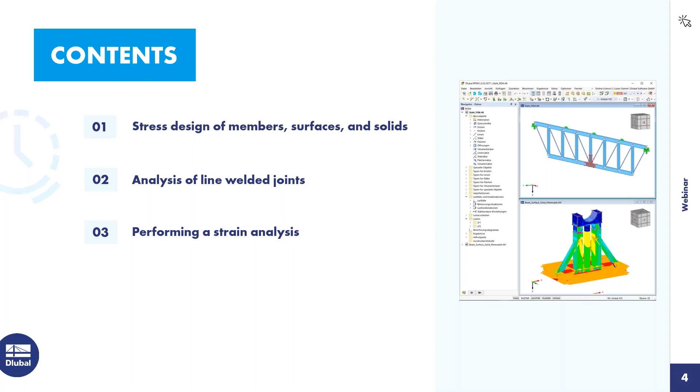Before we go into the live demonstration, I would like to quickly mention the contents of today's webinar. In general, I want to give you an overview of the stress-strain analysis add-on. I will start with the probably most used functionality, the calculation of stresses of members, surfaces, and solids. In the next chapter, I continue with the stress analysis, but for our newly implemented line welded joints. Newly implemented means we have them since RFEM 6. In the last chapter, I intend to show the strain calculation, of course in combination with the plastic material behavior. I will do it as a live demonstration, so I will jump directly into the program, and today I would like to work with predefined files in order to keep the focus on the essential topics.

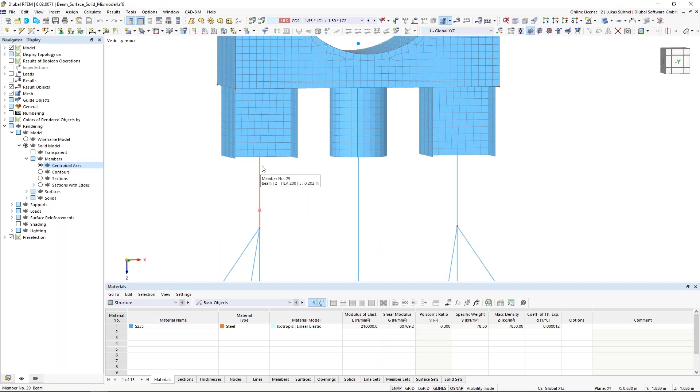What do I have here? I have a mixed structure, mixed in the meaning that I have a member structure, surface elements, and also solids. Let me quickly change the rendering so you can easily see the differences. On the bottom we have this member structure. Then I converted a certain part of my members into a surface structure, as you can see here. It's just the continuation of my members if I display them again. And on top of that, I have my solid model on which I will place some loads.

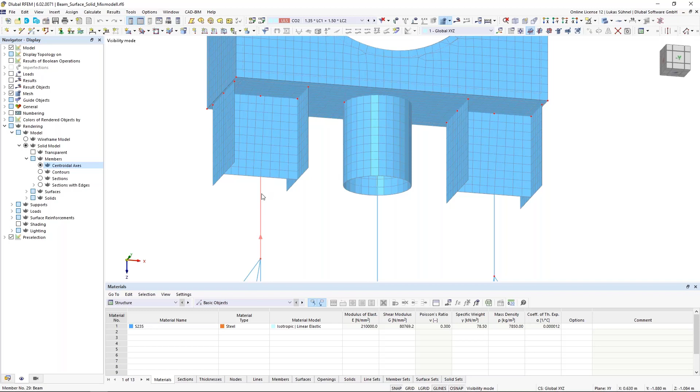Regarding the modeling, which is maybe also interesting to know, we can model members, surfaces, and solids in one structure, which is already quite nice. And if you think about the load transfer and the correct transfer of the stiffness, you have to take care of some things when you have a 1D element and 2D elements.

By simply converting these members into surfaces, as I did it here, often you don't have a properly or correctly defined connection. You can see it on the left. The surfaces in that area are now basically supported on only one FE node - the FE node where this member connects to the web of this beam. That is of course not correct. You would definitely get singularities in that area, and the stiffness transfer is also not correct.

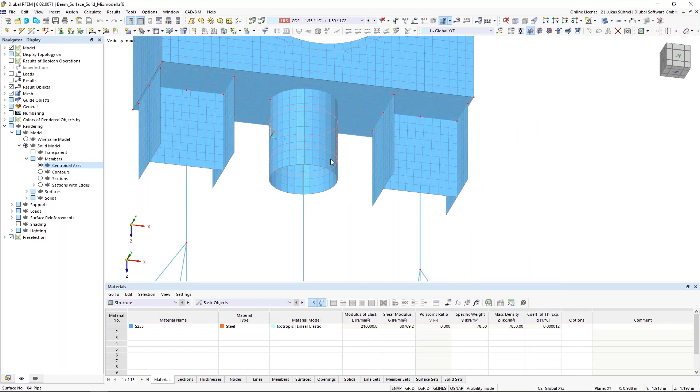Another example can be found in the center. We have here a pipe section, and when you convert a pipe section into a surface, you get of course the pipe surface. In such a case, you have no connection at all. You can imagine the member is in the center of that circle, and the surface is of course not connected to that member at all. So here we also have to do some modifications in the modeling to have it properly connected.

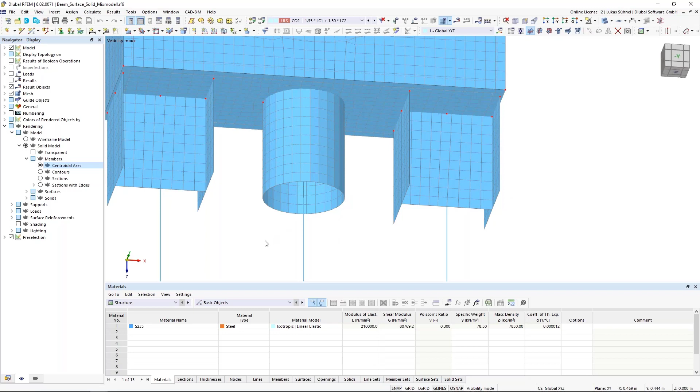And I have it here, I just didn't show it so far. So I will cancel my visibility mode. The connection can be done in two ways. I can use so-called rigid surfaces, and this simply will transfer all my forces and my deformations that I have in this beam, or also vice versa in that surfaces, via a stiff surface onto the other side.

In the center, it's even more crucial, because with this stiff surface or rigid surface, I'm connecting my member with my surface. Before I had no connection at all. And again, all deformations and internal forces will be transferred from the beam to the surfaces equally. An alternative modeling is visible here on the right-hand side.

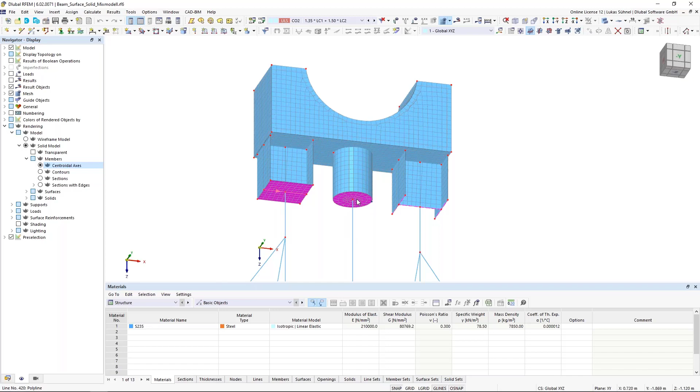Instead of using a rigid surface, I simply assigned rigid members onto the boundary lines of my surface model. A member with a member type rigid works similar to my rigid surface. So this is how you can connect a 1D element with a 2D element. The rigid surface or rigid member may help you here.

Regarding the connection of a surface model with a solid, this is quite easy. The surfaces are defined by the boundary lines. These are those lines here, which you can see. And these lines are placed inside the boundary surface of that solid.

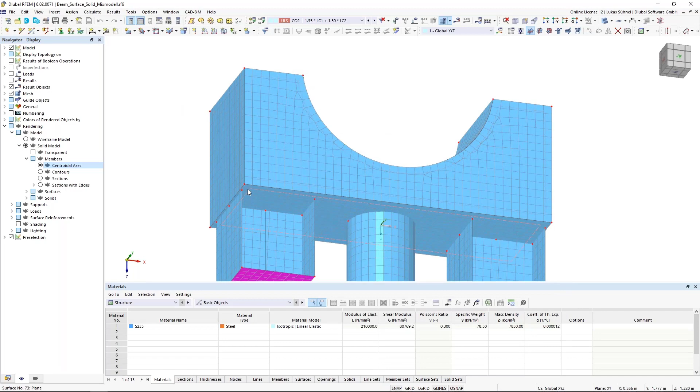And we have a so-called automatic object detection in those surfaces. So the surface detects that there are lines placed inside the surface. And if that's the case, then the FE mesh generator will automatically consider those lines when the mesh is generated. So we have a fixed connection between those lines or surfaces and the solid.

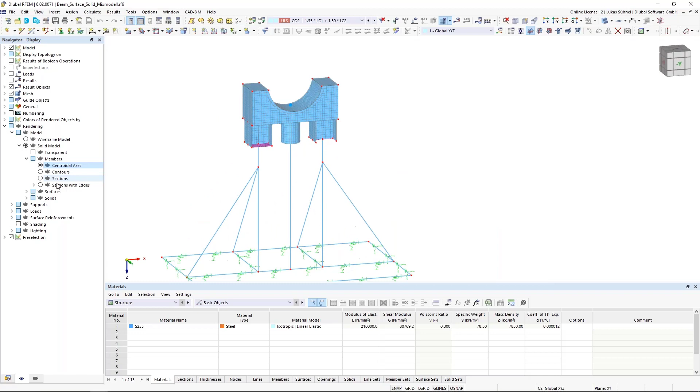So far regarding the modeling. Regarding the loading, this is German names, never mind. I have two load cases. I have my dead load case here, and then some load in my live load case. That's all I want here in that example.

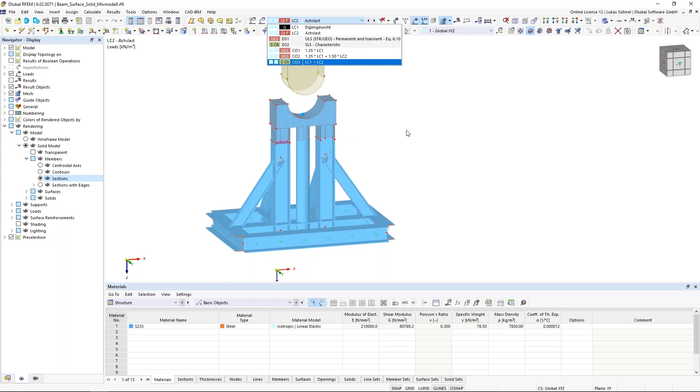And of course, we have the combination of those load cases using an ultimate limit state design situation and a serviceability limit state design situation. Now, if we want to design such a structure, we have two main designs that we have to run. We have to run a stress analysis or a cross-section check for our objects, and we have to run a stability design.

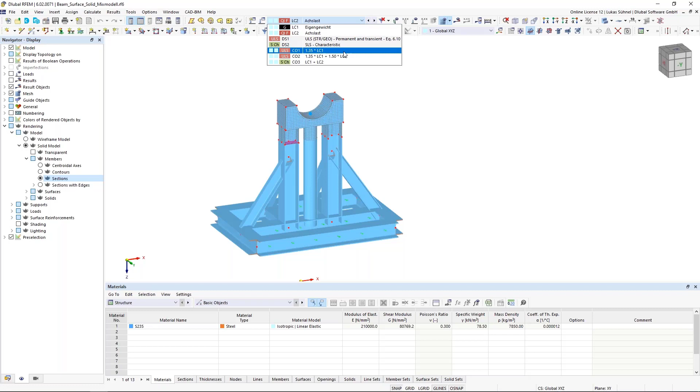Regarding the stability design, I would like to take a look at the results first. So that's what I will do now. I will calculate the important load combination. I have just one here that actually matters, the combination of the dead load and the live load. And let's have a look at the results.

Maybe just on the members for now. I can display the axial forces in here, maybe in a different view like that. And what I can see here is I have, of course, compression in my columns or in my members. So compression is, of course, a sign for buckling.

So if I have compression in members, I have to check buckling. And what else do I have? I have some shear forces inside, but they are really small, so shear buckling is most likely not an issue. I have really small torsional moments, I can neglect them. And my bending moments, MY and MZ, are also quite small compared to my cross section or to the dimensions of these beams.

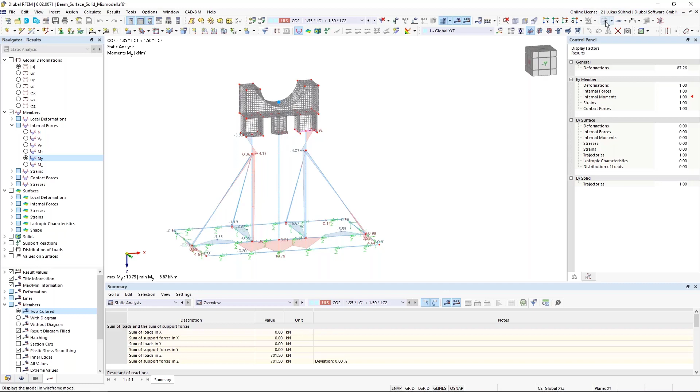So I would say also the bending moments can be neglected. What does it mean? If I neglect the bending moments, then lateral torsional buckling is most likely not an issue. And if I check again my structure, I have all these diagonals here that are connecting to my columns, a pipe section, where lateral torsional buckling is not important at all. So I think it's fair to say lateral torsional buckling is not an issue here.

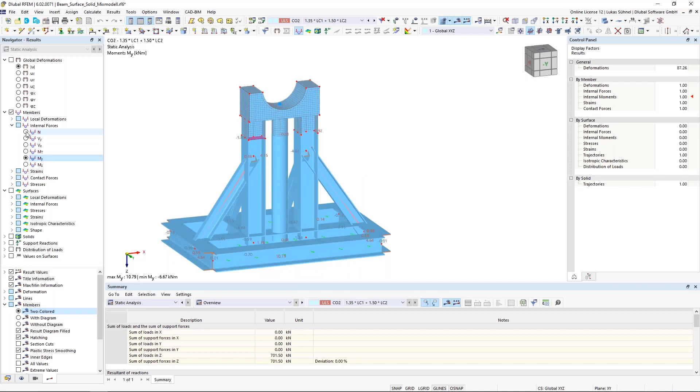What could be an issue is, of course, buckling. But for buckling, I can use some limit checks or some specific checks to judge if buckling is actually an issue. And such a check can be found inside the Eurocode 3 in chapter 6.3.1.2, in brackets, 4.

The formula basically is you take the axial force in a member and divide it by the critical force of a member. If that ratio is smaller than 0.04, you don't have to run a buckling check for the member. If we switch it around, the critical force divided by the existing force, if that is bigger than 25, then buckling is not an issue. This is a value we can check via a specific add-on.

I want to do this quickly before I start the stress strain analysis. So if I go into my add-ons, I can activate the structure stability add-on.

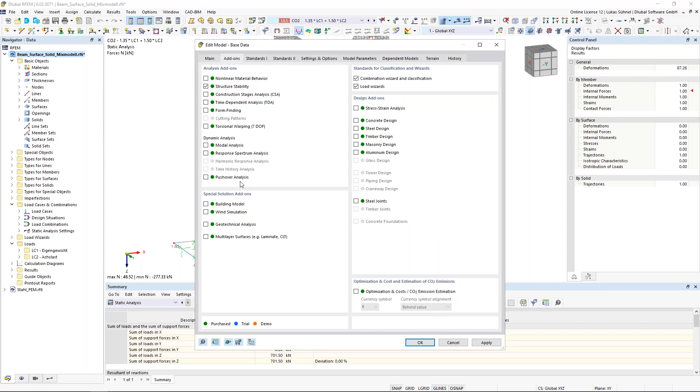Now this will calculate the critical load factor, which is the same as I just said, the NCR, the critical force divided by the actual force. I will calculate it for this specific load combination. I can activate the calculation of the critical load, and I will start the calculation.

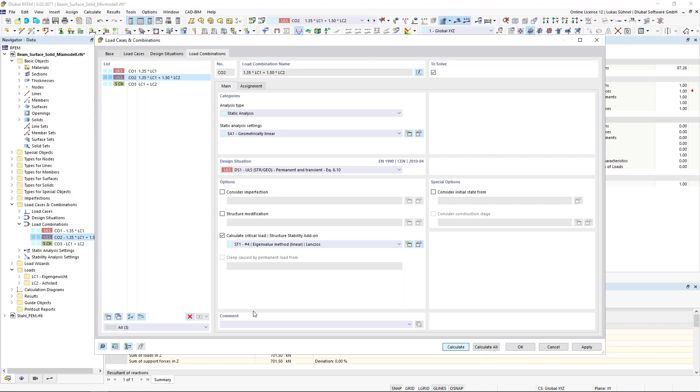So this add-on will calculate this critical load factor. It will also calculate buckling lengths and buckling length factors. For me, what's important now is only the critical load factor. Again, if that is bigger than 25, then buckling is not an issue.

Just a few seconds more. All right, there we are.

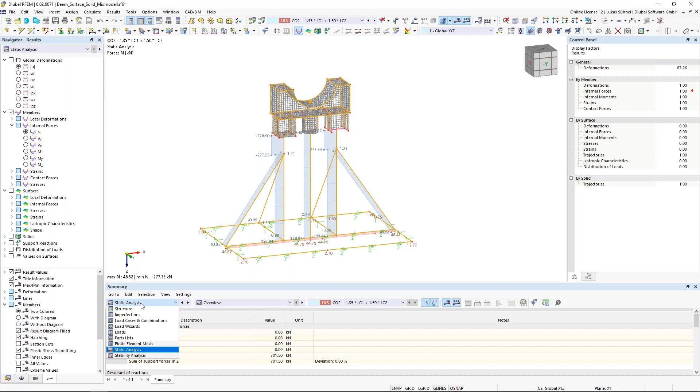So how can I display these results? I can switch in my tables to this stability analysis add-on. The first value shown here is already the one I'm interested in. The critical load factor is 29, which is bigger than 25, so I'm good.

If I want to analyze it further, I would have to look for an eigenmode that actually deals with the buckling. This could be, for example, the fourth eigenvalue eigenmode. Here we see this would be some kind of buckling for my columns.

I have here the factor 34.5, so much bigger than 25. So I can easily say buckling is not an issue. Now I've excluded buckling and lateral torsional buckling. That means it is enough to simply run a stress analysis for the structure.

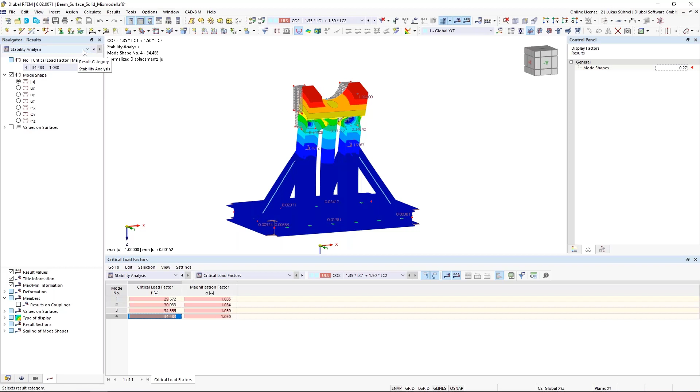I can do it in two ways. First of all, I would like to check what result RFEM, the basic RFEM, gives me. So I go back into my static analysis results without using any add-on, and I can see that RFEM calculates the deformations, of course.

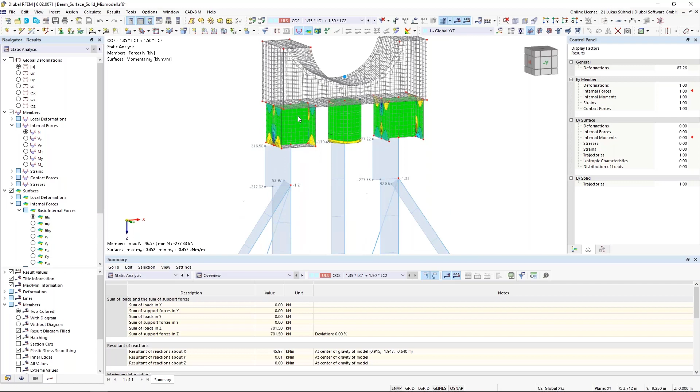It calculates the internal forces in members. It calculates the internal forces in surfaces and so on. But it also gives me the stresses in members, for example the equivalent stress according to Mises. It also gives me the stress inside surfaces, and of course also in my solids.

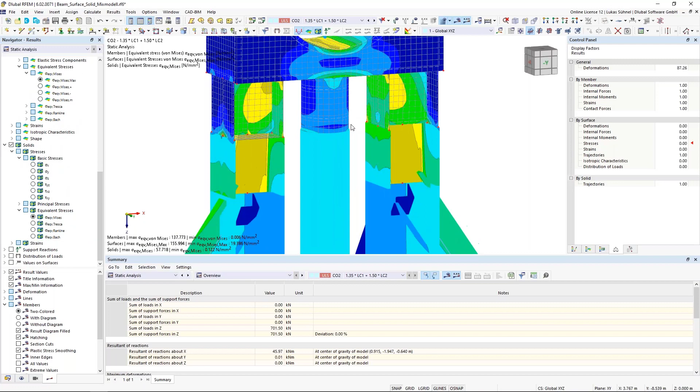So now I'm displaying the stress on all elements. You could use the information in this panel on the right-hand side, or the max-min information on the bottom left of this graphic window, to see that the maximum stress for members, surfaces, and solids is below the yield stress from my steel S235, 235 Newton per square millimeter. We are actually below the limit, so the stress check is fine.

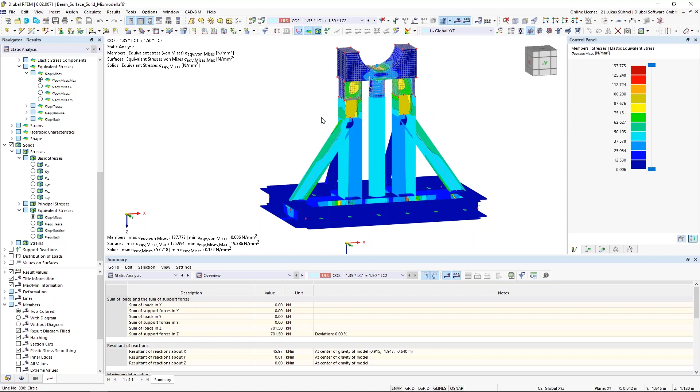Now, if you prefer a design ratio, not just a graphic which shows that stresses are smaller than 235, then you could use the stress strain analysis add-on for that. Let's check this out as well.

I will activate the add-on in my add-ons tab, as I did before with the structure stability. The stress strain analysis add-on can be found on the right-hand side under the design add-ons. Usually we have to deal with standards—if we run a steel design or a concrete design, the standard is important. The stress strain analysis add-on is standard independent, so we don't care in that case.

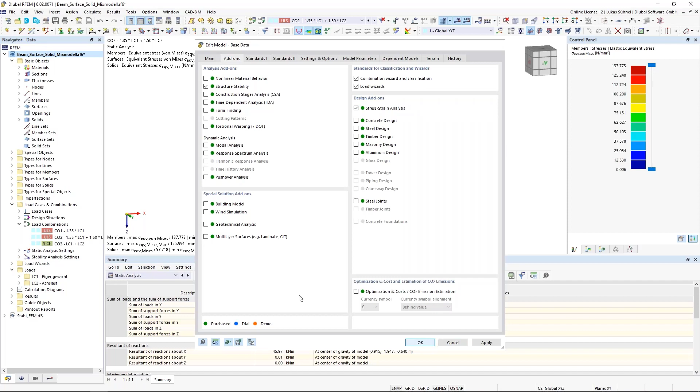Now, when you activate an add-on, you get a new entry in the tables, and this is how I personally usually deal with add-ons. I go into my table on the bottom and click through these subtables. Let's do it for this example.

Just use a different display. I'm here in the input data, in the first subtable design situations, and here I can decide which design situation should be analyzed. Of course, it only makes sense to analyze the ultimate limit state and not the serviceability limit state design situation, so I deactivate the second one.

In the next table, you can select which objects you want to analyze. Here, all objects are selected. You could select the surfaces or the members that you want to analyze if it's not all of them. In my case, I will simply analyze all.

There's another table which looks similar, but this is called objects to analyze stress ranges. If you want to run a fatigue design afterwards, you need the stress range, the difference between the maximum and the minimum stress at a certain location. You can select those objects where you need the stress range. In my case, let's say I need the stress range in my solids, so I'm selecting the solids.

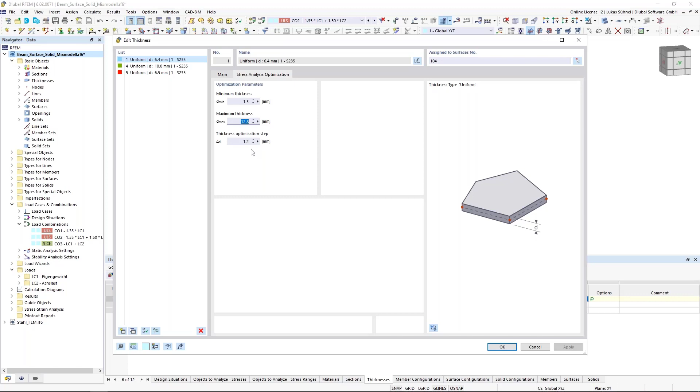So let's say you have a specific surface and you're not sure which thickness is appropriate. You can right-click and activate the optimize functionality here as well. Then you get an additional window where you can define the minimum thickness, maximum thickness, and the step, and it will look for the best thickness. I will not use this now, just as information.

Now we have 3 additional subtables here: configurations. In those configurations, you can define which stress you want to analyze. You could select all of them, but usually that's not what you care about. Usually you only care about, say, the equivalent stress according to Mises, the total shear stress, or the total normal stress - this is maybe what you're interested in.

With a click in this table, you select which stresses you want to calculate, and with the center column, you can also define the limit stress. You can see here the limit normal stress, limit shear stress, and limit equivalent stress are selected.

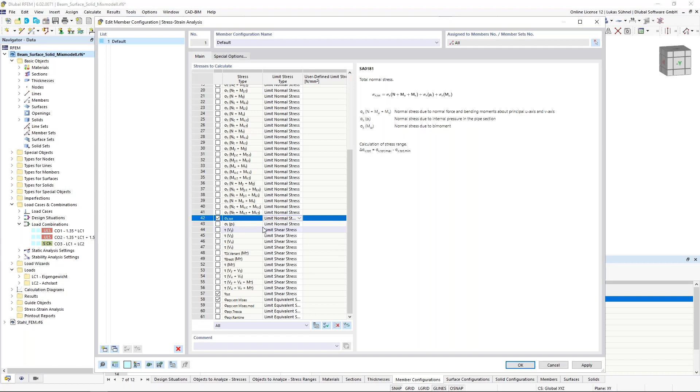We try to do it automatically for certain materials, but for some materials we can't. In that case, you can select 'user defined' here, and then enter a value in the last column. In my case, I'm using the limit normal stress.

For the surfaces, basically the same configuration - let's select only those two. And also for the solids we have a configuration. Again, I'm only interested here in the equivalent stress according to Mises.

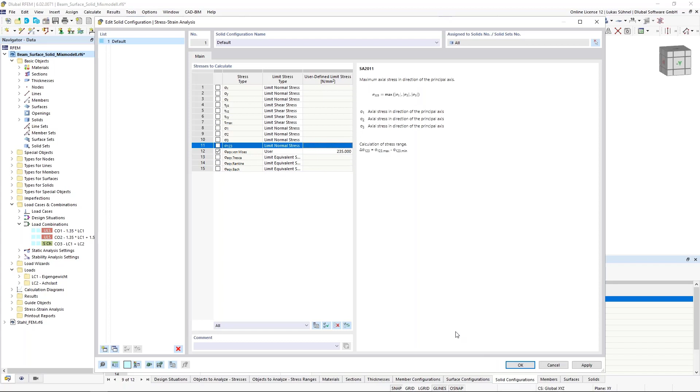And just to show it, we can enter here a manual value, maybe 235 Newton per square millimeter for my material, which is an S235. So that makes sense.

In the last tables, you can assign the different configurations that you may have to your members, but you can also do it graphically. So let's say you have multiple configurations for your members - you can edit the members and simply assign the configuration in that window to them. The handling, I'd say, is quite easy.

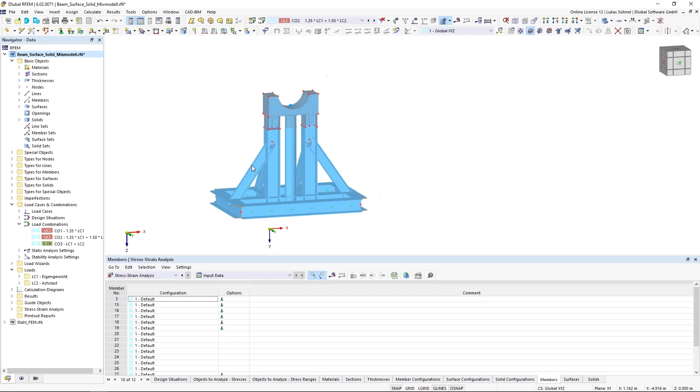We already finished with the input, so we can run the analysis.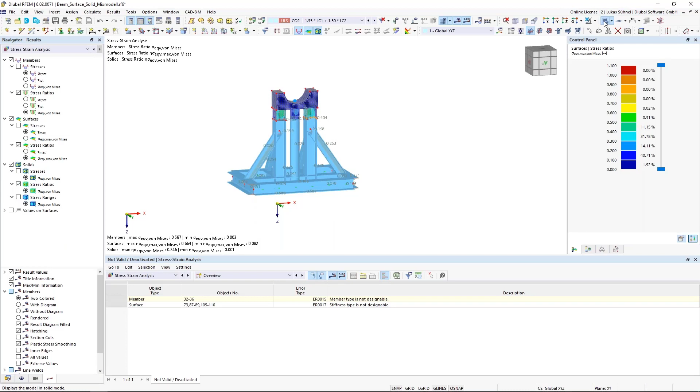All right. So after the analysis, we get results graphically and also in the tables. Let's start with the tables first.

If there are design checks which are not fulfilled, or you have selected objects that can't be designed, you get an overview table. If everything is okay, you won't see this overview table. Just in case something is not correct or you get a warning, it will show up as shown here. We can see here for some members and some stiffnesses or surfaces, basically, the design is not possible. That's nothing which should bother us.

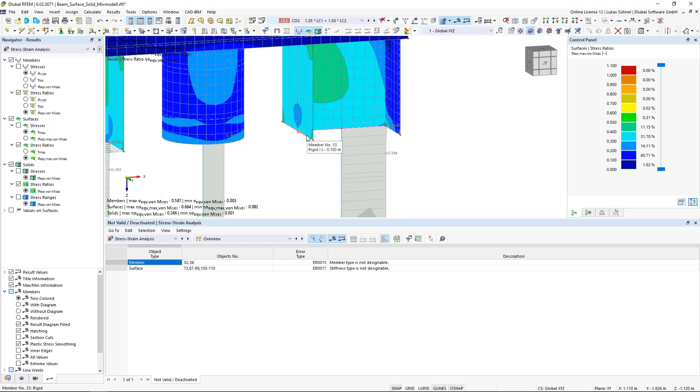At the beginning, we said please design or analyze all members. All members also included the rigid members. That makes no sense, basically. We have no section for them. We have no material assigned to them. We can't analyze them in this add-on. That's what this add-on just tells us here. They are not designable. And the same, of course, for the rigid surfaces. So nothing we have to worry about in that case.

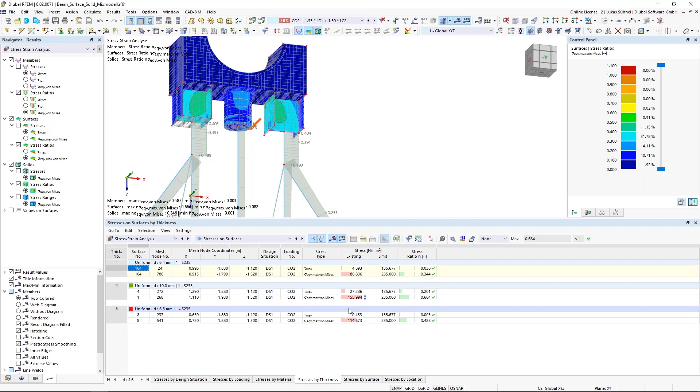If you want to see the details of the results, then you can go into the stresses on members tables, or stresses on surfaces and stresses on solids, of course. So this is the stress or table output with different filters by design situation, or for each surface, the maximum stress, or for the various thicknesses that we have assigned here. So these are the filters basically for the results.

We can also display these results graphically. On the left, you can see we have here an updated result navigator now for the stress strain analysis results. And here we can select the stresses in our members, on the surfaces and so on. I think this is quite clear how to handle that.

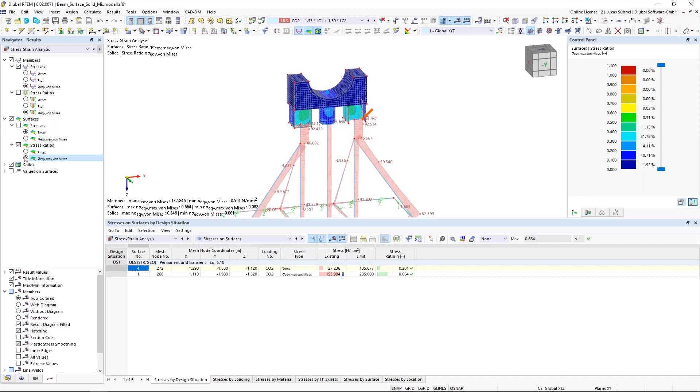And the last information here, we also selected the solids for a stress range analysis. Again, those results can be found in the tables. This table looks a bit different, as you can see. You can see the minimum stress, the maximum stress, the range, the difference basically. And you can also see which combination or combinations are linked to this stress range.

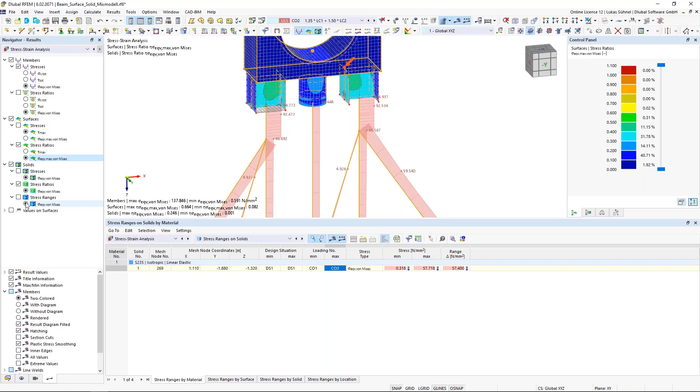All right, again, we could display this graphically. So far regarding this basic functionality, the stress analysis on members, surfaces, and solids.

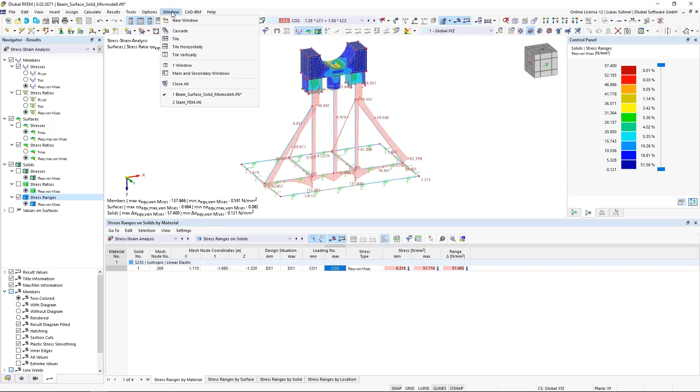And now I would like to switch to my second chapter, where I would like to show you the stress analysis of a line welded joint. For that, I have a different structure. And let me quickly explain it.

It's a 2D truss member. Basically, the tension forces will be taken over by these round bars, the compression by these HEA sections. And one particular detail joint I wanted to analyze with surfaces, basically. You can see the rest of the structure is again a beam structure, a 1D element structure, and this specific detail I want to analyze in detail using surfaces.

I modeled the connection plates here, these tension members are connected to this bolt, and this bolt transfers then the forces onto my connection plate.

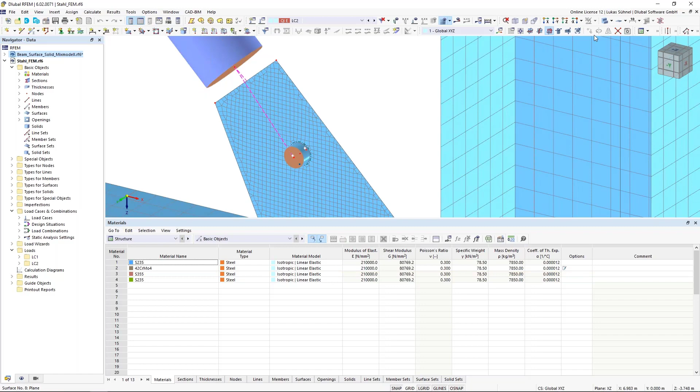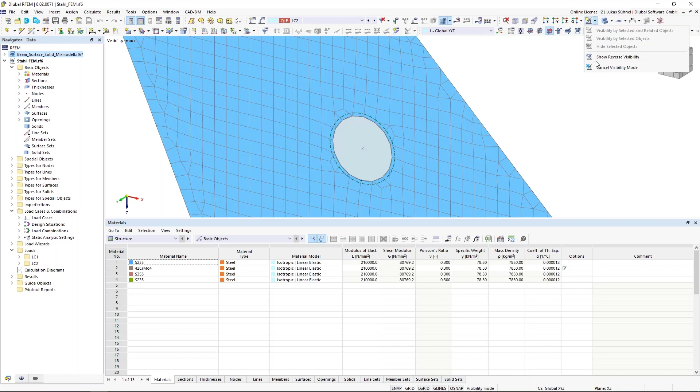The force transfer, for those who haven't seen that before, can be done like this. Usually you create an opening inside that surface where the bolt goes through. But if you have a bolt in the center as a member element, it's not connected to the surface. So somehow you have to establish this connection between, let's say, this node and this connection plate.

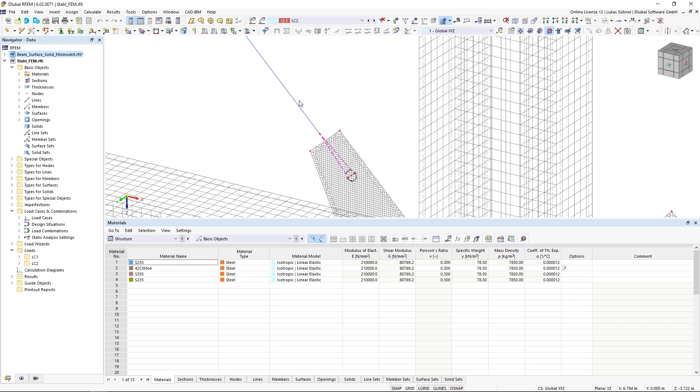And this can be done using a specific surface. So I filled that hole again with a surface, and that surface has a stiffness type without membrane tension. This specific type simply acts only under compression. So you can imagine if we have tension forces in that tension member, then the bolt will be moving to the top left, upwards, and we will get compression in that area. We will get tension on the back side of this plate, but since this surface will fail under tension, we have only forces on the left-hand side. And this is, let's say, a good feature to consider this connection between the bolt and the hole.

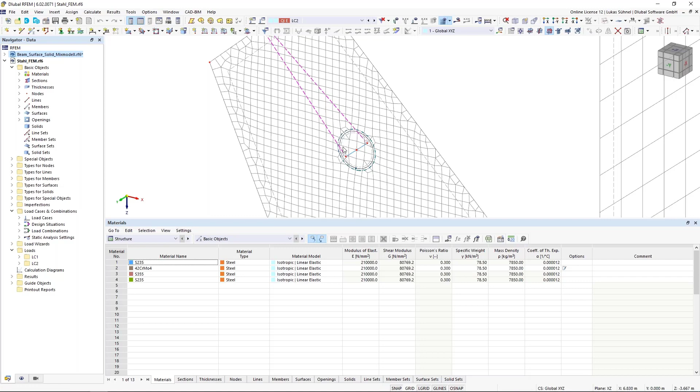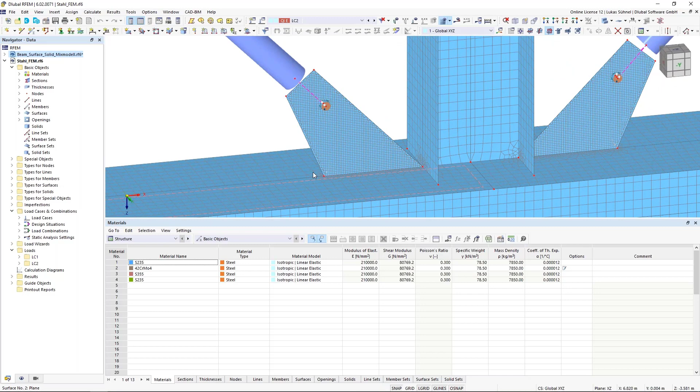All right, so far regarding the modeling. I have, of course, my steel connection plate here, and the steel connection plate should be welded to my top flange of this I-section. Now, if I want to design such a weld, I can use this new object which we have in RFEM 6. It's called line welded joints. You can find it under types for lines.

And you can define a new type in here. Let's say this weld that I want to design is a T-joint, a single fillet weld, continuous arrangement, and the weld size is 4 millimeters.

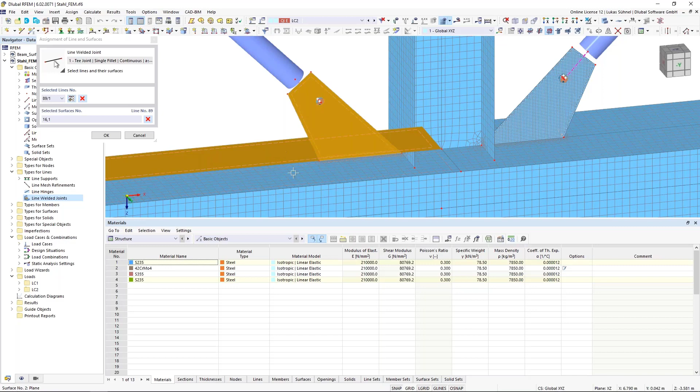So far, so good. Now I can assign this type to my lines, and the weld should be placed here. It's not enough to just connect the line, we also have to select the surfaces that are participating, basically the steel connection plate and the upper flange of my beam. That's how we can define such a line welded joint. We will show it as a dotted line on each of the participating surfaces.

And if you want to design such a weld, you need the stress strain analysis add-on. Basic RFEM 6 won't give you any results for that line welded joint, so it's required to have the stress strain analysis add-on, and that's why I'm activating it again.

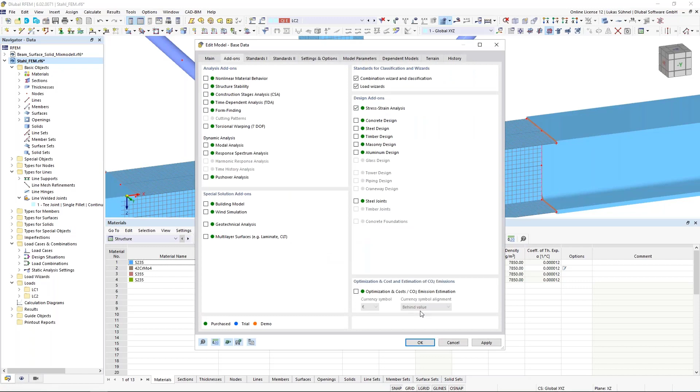Now let's go quickly through the input of this add-in. I'm starting again with the design situations, I think that is clear. Objects to analyze: in that case, I don't care about the stresses in my members.

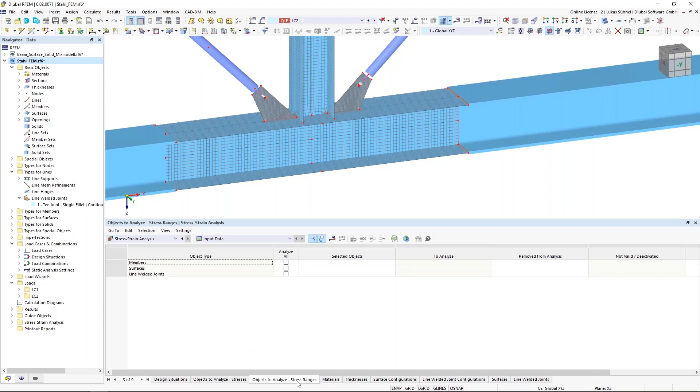I want to select just some of the surfaces that I want to analyze, not all of them, and of course I want to analyze my line welded joint. Stress ranges, I don't care about in that case here.

And I will continue with the surface configuration. Again, I will select just some of the stresses, I'm not interested in all of them. Maximum shear stress, maximum stress according to Mises is quite interesting for me.

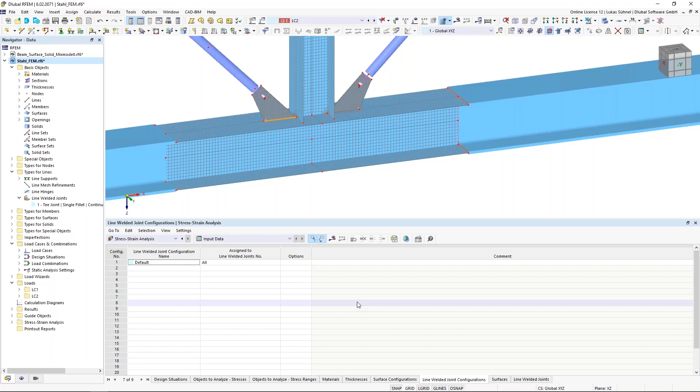And now we have also a new configuration for my line welded joint. Each specific object has its own configuration: surfaces, members, solids, line welded joints. And in here, it looks basically the same - I can select which stresses I want to calculate.

Even though you select maybe all of them, not all of them will be shown. It depends. For my fillet weld, I have two different methods, the simplified method and the directional method. Let's say we are using the simplified method - for that method I only need the following stresses, those four, and the resulting weld stress. If I select the others as well, they won't show up in my result table since they are not part of this simplified design method. So that's why I select just those four, those five.

And same logic as before: when we select the stress, it means we tell, or we say to the add-on, please calculate the stress for this specific stress type.

By default, we do not get the limit stresses for the welds. You can see it here, it's selected none. Why is that the case? Well, we are standard independent in that add-on. That means the limit stress for welds is, however, standard dependent usually.

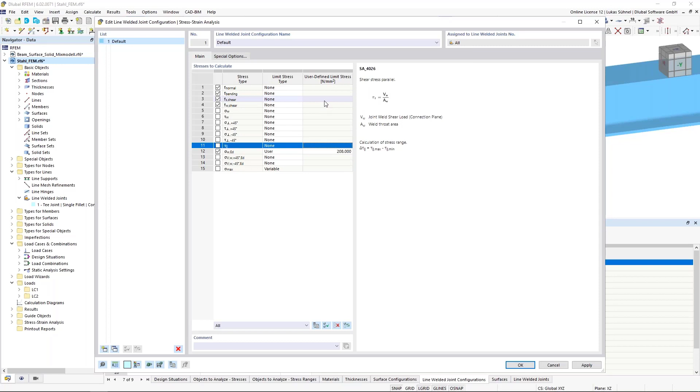Let's say we assume here a Eurocode design, then the limit stress for this simplified method would be for an S235: FU divided by square root 3, divided by beta W, divided by gamma M2, which is 208 Newton per square millimeter. I could also enter this limit stress for the other types, but it doesn't matter - I only need it for the resulting stress.

All right, so far so good. I defined all necessary inputs, and now I can run my stress strain analysis again.

Okay, I get the overview table. It shows me some exceeding stress for my surfaces. I will take care of that later on.

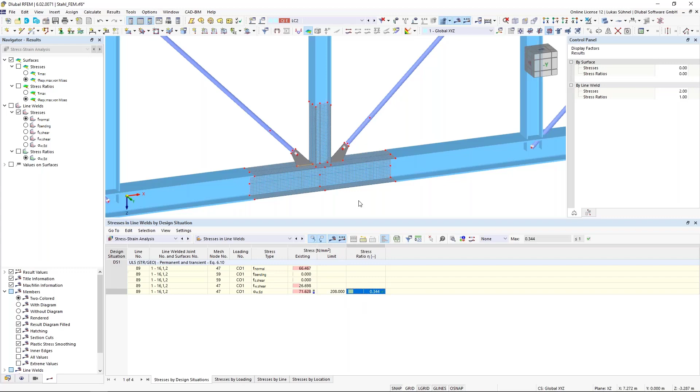Now I'm interested in the line welded stresses, and we can see here we have an existing stress of 71 Newton per square millimeter, which is smaller than the limit. So we get the design ratio, and the weld has been checked.

We can also display the results graphically as usually. Just let me show it quickly. We get the diagrams also shown here. Maybe it's better to select a specific visibility for them: the different stresses, normal stress, shear stress, resulting stress, and of course also a stress ratio, and that's it.

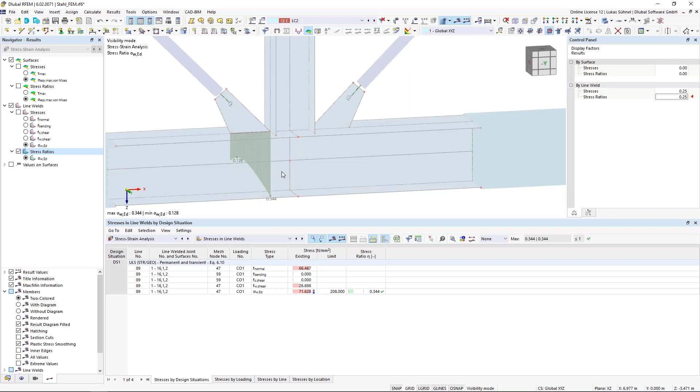You can of course print these graphics into your protocol as you are used to in Dlubal. The tables will end up in the protocol, so I think the handling, the post-processing is clear. So far regarding the line welded stress, or line welds.

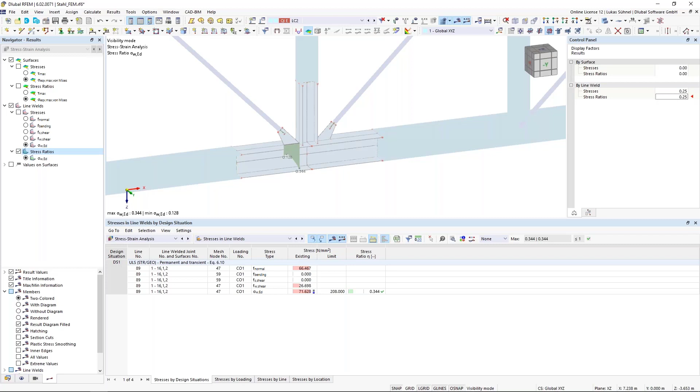And let's analyze this exceeding stress in the surfaces. Let's display everything again. Maybe let's turn off the FE mesh for a second. And of course, we need the stresses in the surfaces.

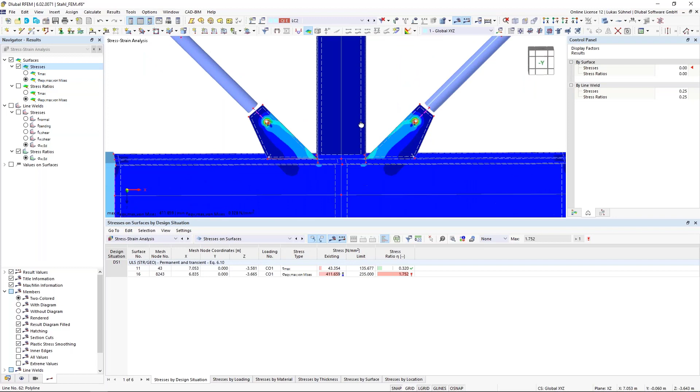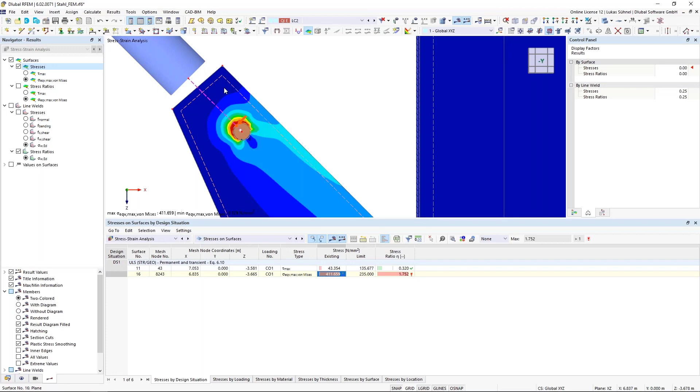So what we can see here in the table already is that we have an existing stress of more than 400 Newton per square millimeter, which is of course exceeding the limit stress. And we can also see by clicking on this table, this nice arrow, which shows us where the issue is. And the issue is where we have the bolts connecting to the connecting plates.

Now, I think it's quite clear that such a stress cannot show up in reality, simply because the S235 will yield when it reaches the limit stress. It can't get these kind of stresses. The steel will yield, it will deform. So we get these high stresses because we use a simplified material model for our steel.

The default is usually an isotropic linear elastic material model, which means we can get stresses like infinite stresses. Since this is not exactly correct, we could in theory use a different material model. The default material models are, however, only isotropic linear elastic models or orthotropic linear elastic models. Plastic is not supported as a default setting. If you are looking for more advanced material models, you would need the nonlinear material behavior add-on.

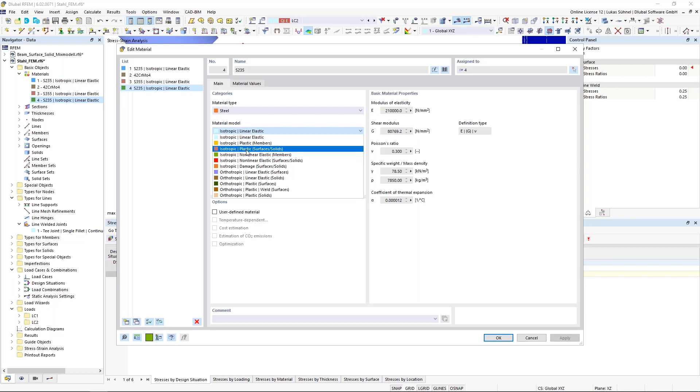I can select it here. And now you can see if I edit my material again, I have much more material models. For example, the isotropic plastic material model for surfaces and solids. That's the one I select. And these are the parameters for this material model.

I can select the basic or bilinear stress-strain diagram. I stick to the basic diagram type; that should be enough for my case here. I could select the stress failure hypothesis. This is fine for me. And that's all I need to define.

If I assign this material model to my material, it means it will yield as soon as it reaches the yield strength of about 235 Newton per square millimeter.

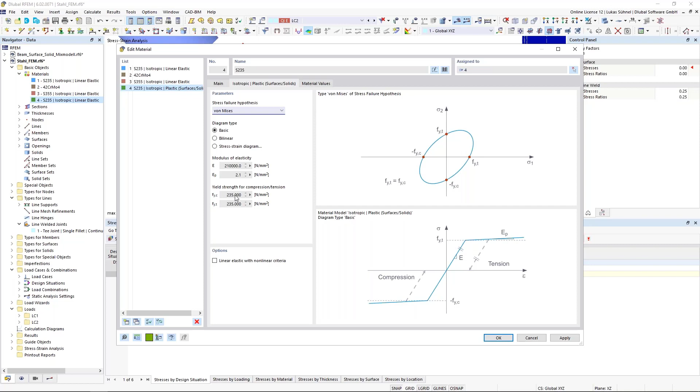How do we do this in the calculation? For that, I would like to show the FE mesh again. How do we consider this yielding? Well, you saw before that we had some stress peaks in that area here. The stress in those FE elements was higher than the limit stress.

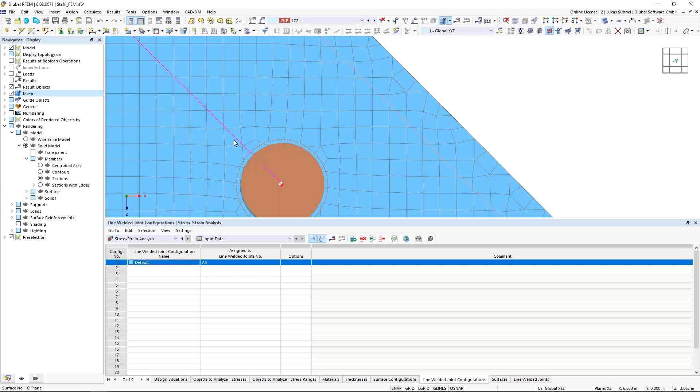If that is the case, with the plastic material model, we will reduce the stiffness of an FE element. So we take a look at each FE element and we reduce the stiffness of those FE elements where the stress is exceeding the limit stress. If we reduce the stiffness, it means they will deform much more than the other elements, which with the regular stiffness will take over more of those forces until they maybe also reach the limit stress. Then we will reduce the stiffness again, and so on. That's the logic that we're using here.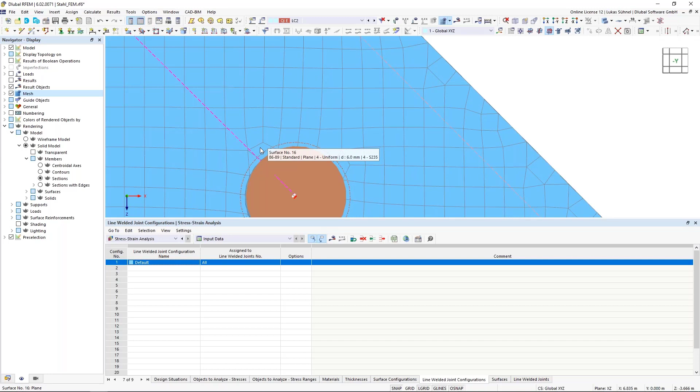So we take a look at each FE element, and since we do it on this FE element basis, we should also check the results on FE elements. What does it mean? I can go to my calculate menu, under the result smoothing function, and select constant on mesh elements. The default, I think, is this one: continuous within surface sets, or otherwise within surfaces.

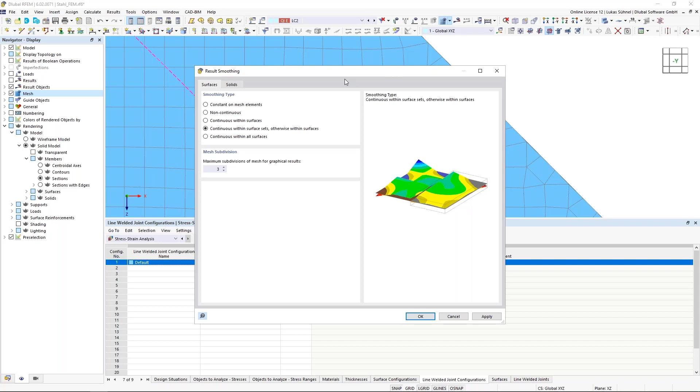So we get a lot of results for FE meshes, or for each FE node we get a result, and usually we use some functionality to smooth those results so that they look nice. In this particular case, when we have this FE mesh specific look on the results, we should also smooth it constant on FE mesh elements, so we get this pixel-like look afterwards.

This setting under calculate result smoothing is for the results of RFEM 6 itself. We have the same setting in our stress strain analysis add-on. So if I go to the bottom left, stress strain analysis settings, I can also select it for this add-on, which I'm doing here.

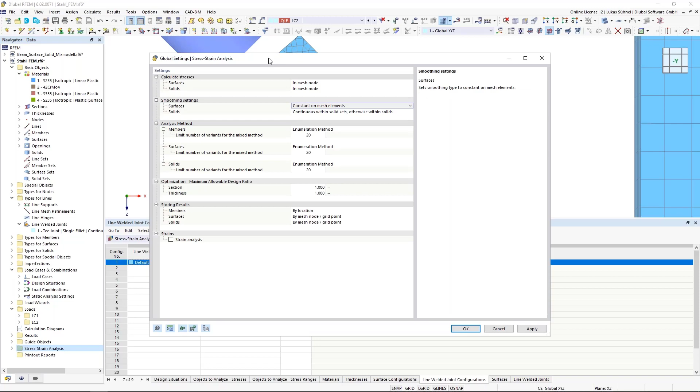Now I can recalculate the results, and small spoiler, we won't get any stresses higher than 235 Newton per square millimeter due to this material model. So the stress check is fine, it's not a big issue anymore, but that's not the end of the check.

We will get higher deformations. We get these plastic strains probably in our structure, and that's usually what you look at when you use the plastic material model. You check the strains because the stresses are not relevant anymore.

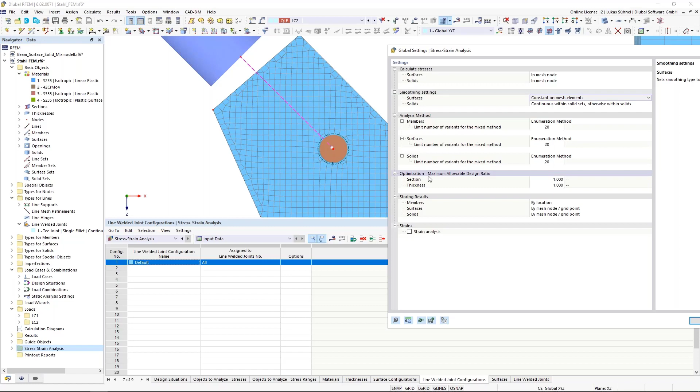We can run also a strain analysis inside the stress strain analysis add-on. That's basically what the module name is, stress strain analysis. We can activate the strain analysis also in these global settings.

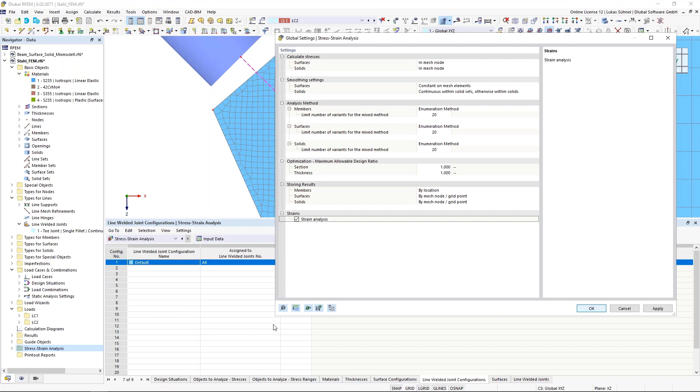Where I change the smoothing settings, I can activate here the strain analysis. I click OK, and if I activate that analysis, I can go back into my surface configuration, and now I have this additional tab here. It shows me now strains.

Again, I can select for which strain I want or which strain it should calculate. Let's say the Mises strain. And we also have a limit defined for that.

We have a plastic limit strain of 5%. That's what we defined here. You can change it, of course, by simply clicking into it and defining a different value.

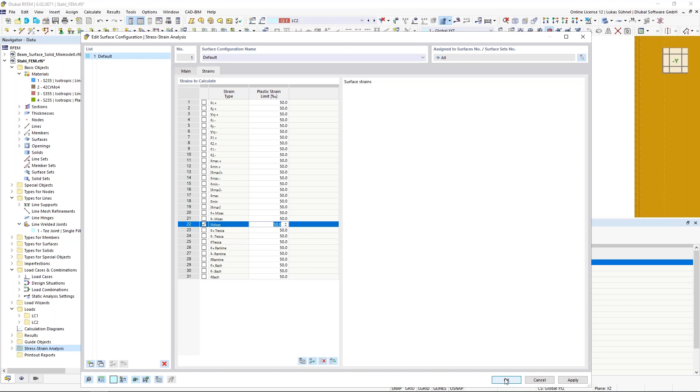That's what we're defining here as a limit. Of course, you could say your limit is when the strain is so big that the bolt moved completely through your connection plate, so that the structure is unstable during the calculation. I'm not sure if that's the right limit. We defined here the 5%, but at the end it's up to you.

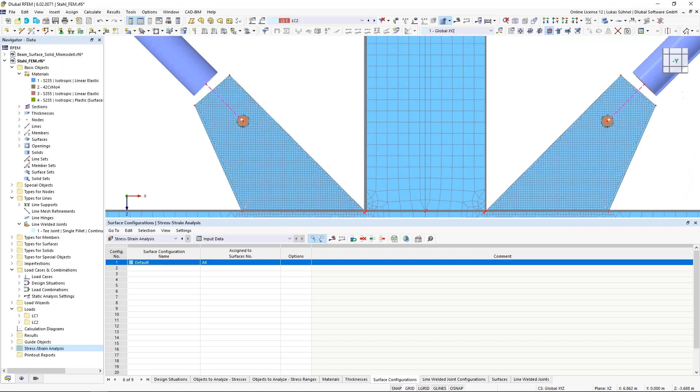That's all that I have to define here. Now I can run the stress strain analysis again. It will take a bit longer because now it's a nonlinear analysis. Each FE element is nonlinear, so we will need more iterations until we get an equilibrium, but still quite fast in that example.

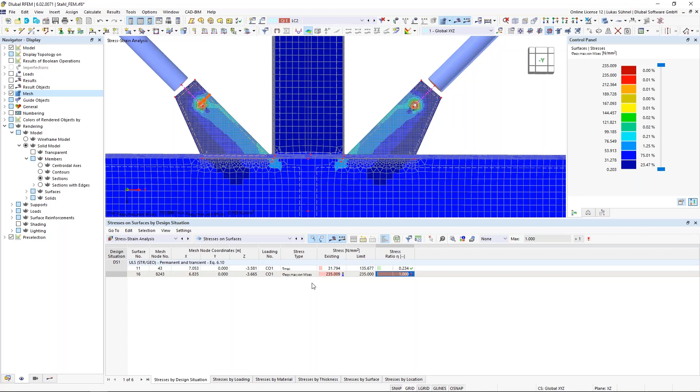Let's have a look at the results. I get the overview table where it says stress ratio is 1. If I check the details, it's just slightly above the limit, so it's just a numerical issue, not a big deal, we can neglect this. The stresses are, of course, fine, as you can see here, we have 235 Newton per square millimeter maximum.

We also have this pixel-like display of results. That's the result smoothing that I changed. And of course, we can now also check the strains.

As I said, this is now important, so instead of checking the stresses on surfaces, I can check my strains on surfaces. And this table looks also similar. We have an existing strain of 6.2 per mil. That's, however, the total strain.

The plastic strain is just 4.4 per mil, and this plastic strain will be compared to the limit of 50 per mil, which results in this plastic strain ratio. So this is the strain design, basically.

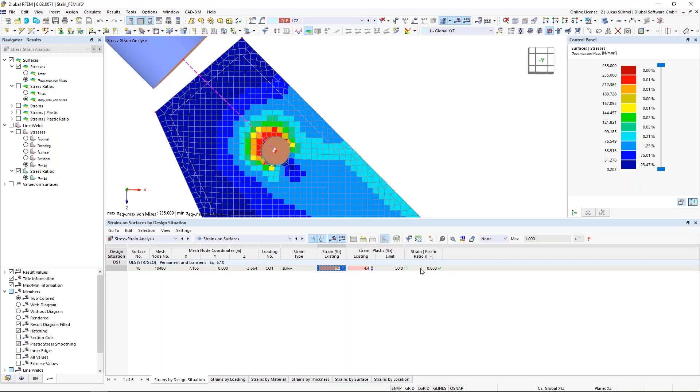This is how you can do it with the add-on stress strain analysis. And that is also what I would like to show you here.

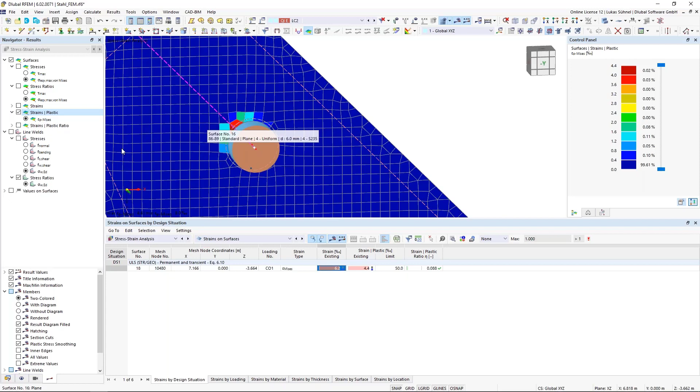Maybe what I forgot now, we have, of course, also the strains as a result graphically, let's say the total strain, but also the plastic strain, which is always smaller. And again, also the plastic strain ratio. Well, not much to see here, but the plastic strain.